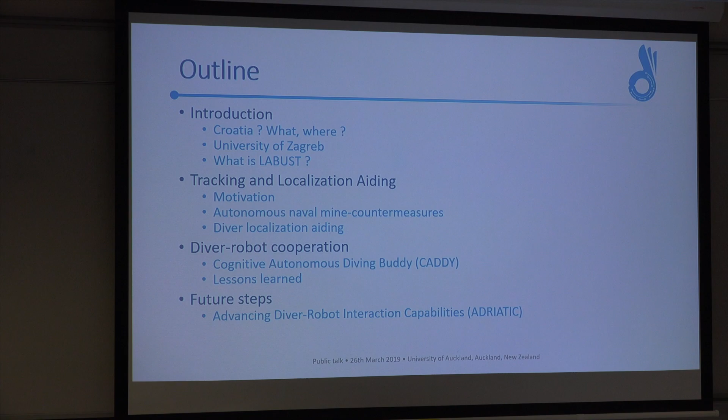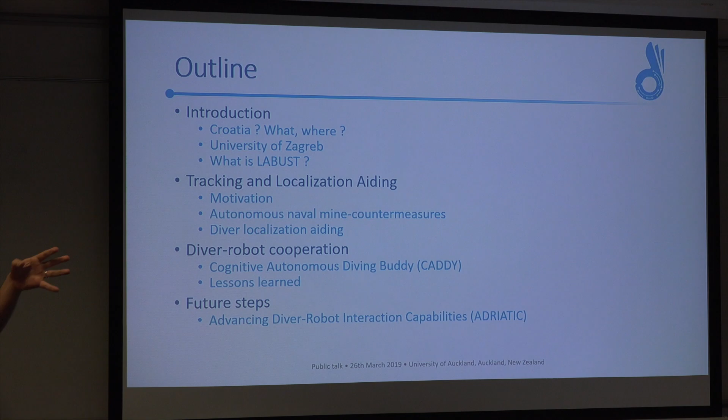Most of you probably know where Croatia is, but we will refresh your memory. I will talk a bit about the University of Zagreb and our laboratory, what we do. After that, we will continue to some interesting things like tracking, localization, aiding for divers and also for underwater vehicles, and show some projects we went through, in which we actually first started with vehicles and then ended up at the divers. Then I will talk about the Cognitive Autonomous Diving Buddy, or CADDY project, which was actually our first really large diver-robot interaction project.

Based on some lessons learned during this project, we were able to acquire this ADRIATIC project that we have with our partners here at the University of Auckland, and perform another set of improvements towards getting this more product ready rather than just doing basic research.

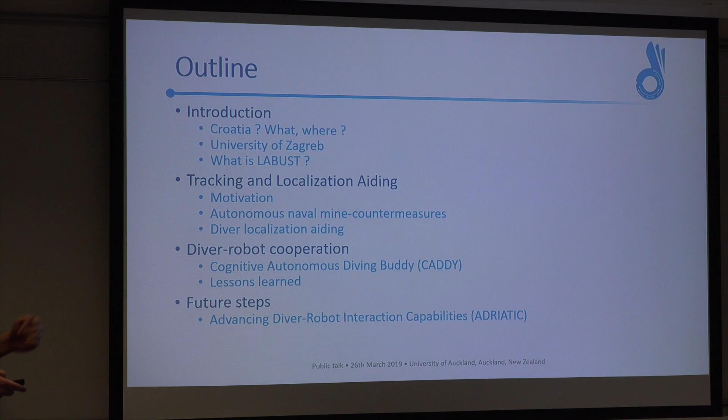So let's get started. To refresh your memory, I've shown here a few pictures from Croatia. There are a lot of pictures, so I didn't know which to choose, but I took some of the most memorable. If you like history or Game of Thrones, you know about Dubrovnik, a medieval city in Croatia on the south part of the coast. If you follow football, you know our national team, or probably some of the players like Modric, and you know they won the silver medal last year on the World Cup.

If you like nature, like the beautiful nature you have here in New Zealand, then Croatia has a lot of beautiful inland nature and a very developed coastline with thousands of islands, and also a mountain range very close to the sea. So this is a nice way to walk, looking at thousands of islands from the mountain.

And finally, if you really like Christmas decoration, you'll be glad to hear that Zagreb has won this award for the Advent, for the best organization. So the best Advent in Europe is actually in Zagreb for several years in a row.

Since we're also engineers here, I guess we should have some numbers. Croatia is located in the south central part of Europe. It's a quite small country, like 4 times or more smaller than New Zealand. The land area is around 56,000 square kilometers. The sea area is around 30,000 square kilometers, and this sea we actually call Adriatic, similar to the name of the project.

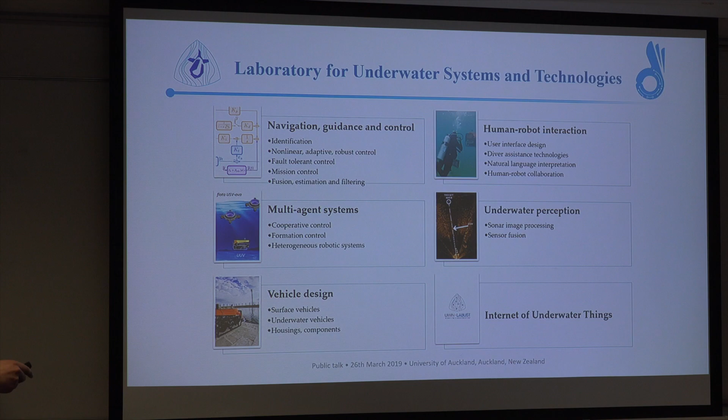As of 5 years, we have human-robot interaction. We started this with the CADDY project, and also underwater perception, because you really need to find the diver in the water and be able to communicate with him. And as sensors are now getting much cheaper and smaller for underwater, we also started looking into the Internet of Underwater Things. The Internet of Things on land is already picking up, so it's time for it to go underwater anyways.

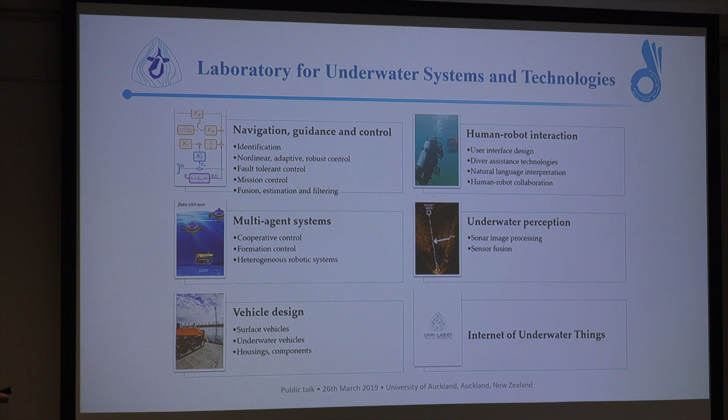So this is a short introduction about who we are, what we do, and where we come from. Now we can move to some of the projects that we do. Our first interest was in tracking and localization aiding of underwater agents in general.

So why this fuss about underwater localization? The thing is, if you're on land outdoors and you have a global navigation satellite system, you pretty much know your location. Once you move indoors, you already have some problems - you need to use either a camera or mount some new sensors inside the room to get your location. And when you go underwater, it becomes even more complex. Now you have a 3D environment where the visibility is very bad, and you lack global navigation satellite system completely, as soon as you go underwater, since GPS or electromagnetic signals in general are attenuated very much underwater.

So if you're moving in a water column, you don't really have any reference to where to go. It's useless to use a camera because you don't have any reference. And even if you're on the bottom, you could have a featureless bottom, which also makes it very hard to navigate a vehicle in such an environment.

There are some alternatives, and these are usually quite expensive sensors, starting at some 15,000 New Zealand dollars and up. These are acoustic sensors like the Doppler velocity log that give you velocity of the vehicle relative to the sea or relative to the bottom, if you can reach it. You also have localization systems, acoustic, that give you distance or bearing towards a beacon that is either georeferenced underwater or floating with access to GPS, so it knows its position. So this is how you can get position. These are usually very slow systems, especially acoustic localization. Maybe each second or each 2-3 seconds you can get a position, and the farther you go, the longer it takes, because of the travel time of the acoustic signal. So even if you manage to get these expensive sensors, when you go for scaling, it gets very, very expensive.

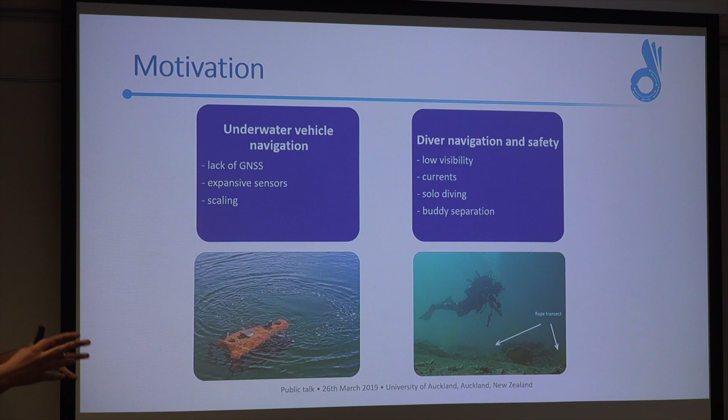This is why we actually started the CADDY project back then - this relation between underwater vehicles and divers, noticing they have the same problems, so we could give the same solution for both. This didn't occur to us at first, of course, but we had one project where we noticed these similarities very easily. It was some 10 years ago, autonomous naval mine countermeasures. The basic idea is you want to remove the manned ship from the minefield - you don't want people there, so you need to ensure crew safety.

It also reduces a lot of the cost, because if a ship is destroyed, it's very expensive and a lot of lives are lost. If a small autonomous vehicle is destroyed, well, you just buy another one. It's not such a problem.

At that time, there were some alternatives where usually you would have a remotely operated vehicle equipped with a sonar and some expensive sensors. You would be a little bit off the minefield but still with the ship, put it down, the operator would drive it to the mine and then neutralize it. So for this you still needed a ship, so they said let's have an autonomous vehicle that could detect the mine by itself and then neutralize it.

This is fine, but if you want to detect a mine, you really need a very good sonar, and a very good sonar is also very expensive and large. So it didn't make much sense to destroy it.

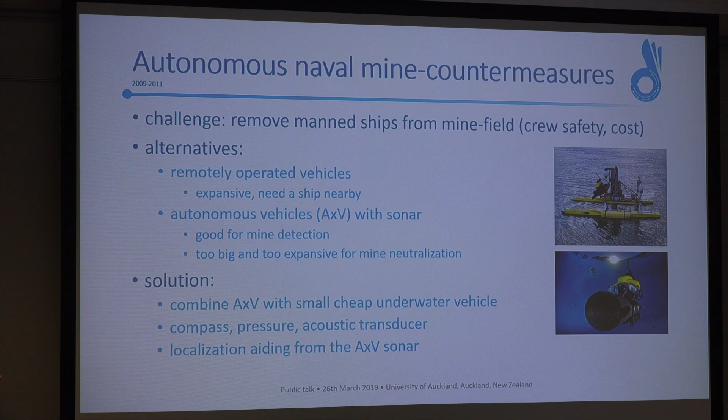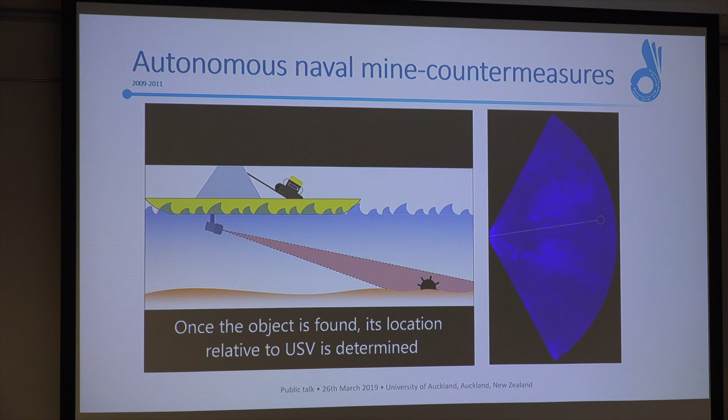So our solution, at least in this project we investigated with NATO, was to combine a small, cheap underwater vehicle equipped with just a compass and pressure sensor. The concept was you would have either an autonomous surface vehicle equipped with this sonar, or an underwater vehicle with a sonar, that would carry this small vehicle.

When it finds the mine, it would drop the vehicle into the water, detect it with the sonar, using this expensive sensor to provide localization aiding to the small vehicle and guide it to the desired target.

The communication here is just acoustic communication again, and the vehicle had just a cheap acoustic transducer. So basically the communication was one way.

The idea was, okay, we can place it near the mine, we can activate it when we want, and we can go off, because with acoustic communication you can easily achieve 1-2 kilometers, so you can go to a safe distance. You can maybe use it to position this overnight in the minefield, and then when you really need to do the attack, you activate them, clear the minefield, and go out with the ships.

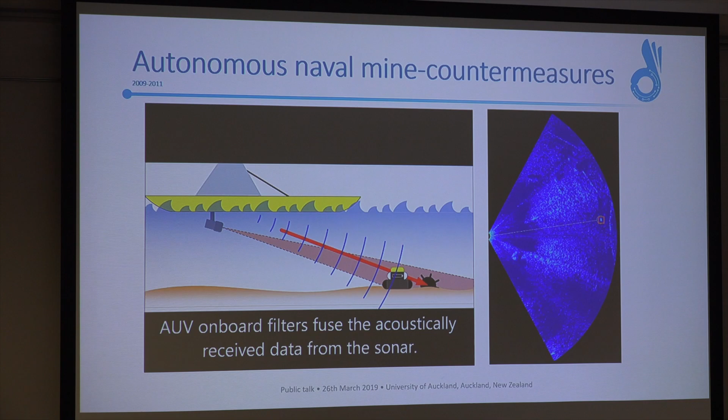So there were a lot of applications for such a thing. But then we thought, okay, this small vehicle has a compass and a pressure sensor. It kind of sounds like the same sensor suite that a diver has. So why shouldn't we try this with a diver?

So we took on a small diver tracking and localization aiding proof of concept project to see what would happen. We decided first to go with a surface vehicle. We could either mount the sonar on it or maybe some other localization device.

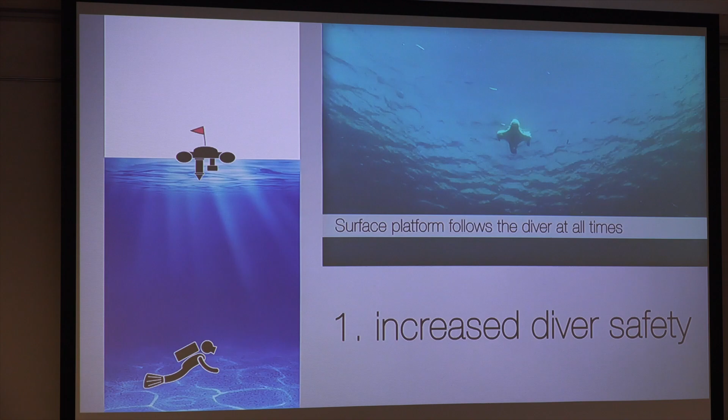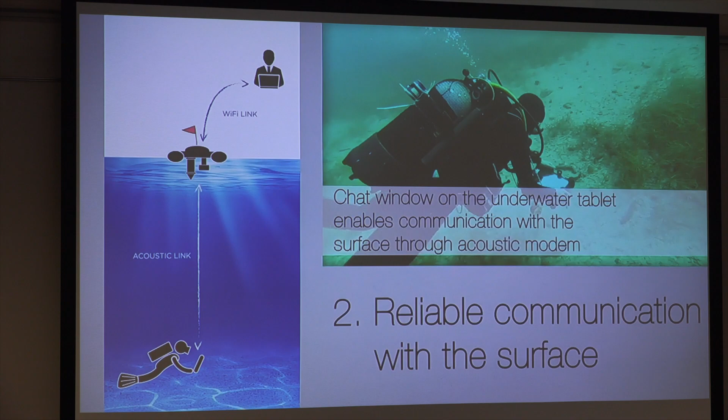What we did was create this small vehicle and mount an underwater localization system, a USBL, an ultra-short baseline system. This system communicates with the diver through another modem. The diver has a small beacon on his back that can communicate, and you achieve simultaneous localization of the diver and simultaneous communication.

We added a simple commercial tablet, just put it in a housing, and used an inductive pen to operate it. We created an ability for the diver to actually chat with the surface, and the surface could send the diver back some commands or answers.

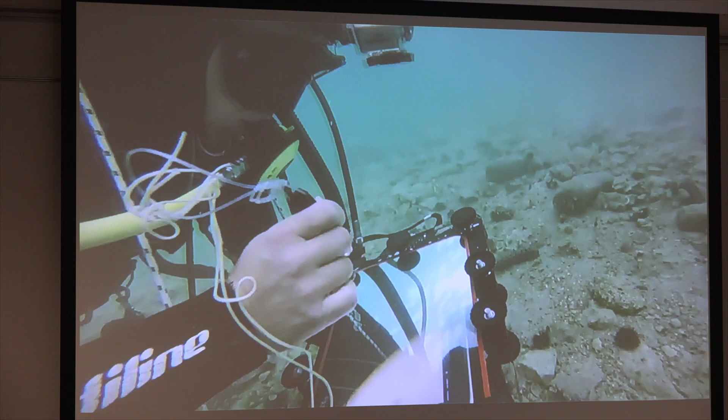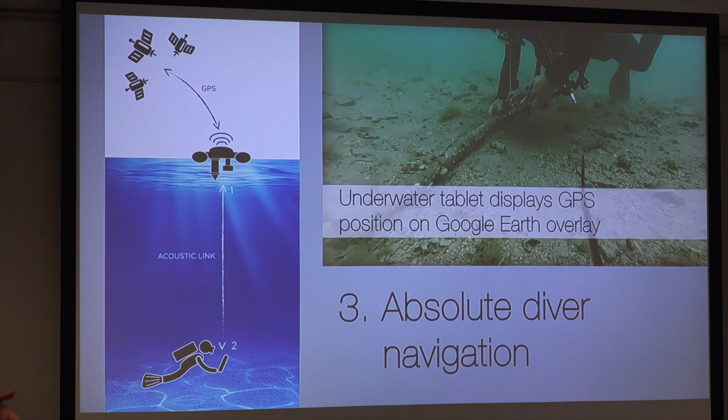Since the vehicle is equipped with a GPS and this localization system, it can actually know the diver's position and send it down to the diver. So the diver has his own position on the map, and if he needs to go to some point, he can simply look at the tablet, position himself, and go there. This was much easier than looking at the compass and counting how long you go.

Also, this vehicle was doing the tracking just to ensure that the acoustic channel is as vertical or short as possible, so that it is quite reliable over time. The divers seemed to think this is a very good idea.

The thing was, okay, so this vehicle tracks and gives you position, that's good, but it doesn't help you a lot more. If it's above you, it's maybe like a diving buoy, so you have like a private satellite. They wanted a bit more, so we were thinking, okay, what could we do?

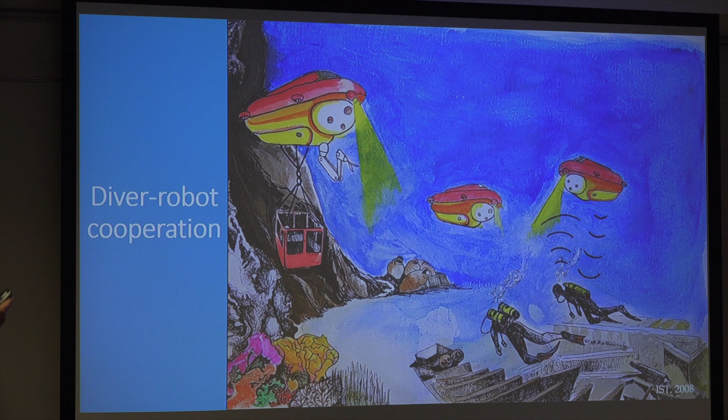One option was, of course, let's try to introduce another vehicle, just throw another vehicle at the problem. So we decided to still keep the surface vehicle and add one underwater vehicle. This vehicle would be like a diving buddy, basically always close to the diver, so it could do better localization aiding and give better positioning. It could also perform mission monitoring, because being close to the diver it can record with a video camera, not only with the sonar.

Finally, it would be a very good tool so the diver could use it, record it, drag it around, or tell it to do something. Of course, the diver himself is very good at scene interpretation and manipulating small objects, which is very hard to do with the underwater vehicle. On the other side, the diver would need to carry all the underwater vehicle sensors, which would be cumbersome for him. So basically we have a diver-robot synergy here.

That's why we decided to call it BUDDY. This project was, as I mentioned, called CADDY. It involved 7 partners, and we got some 3.7 million euros to do some testing.

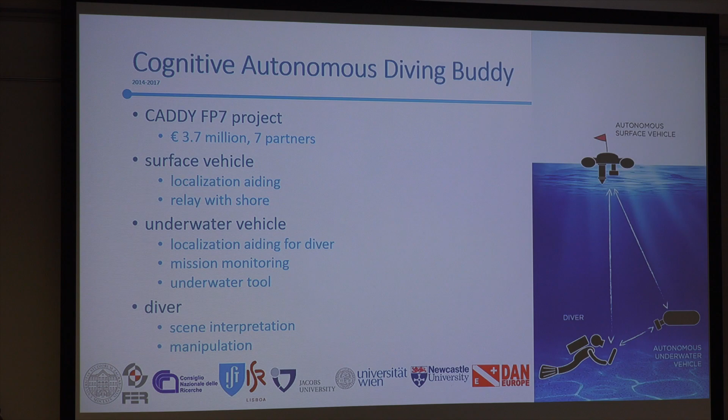When you look at this possible diver-robot synergy, there are many avenues you can go down, so we had to select a few. We decided on these 3.

The first one was diving observer. We wanted to collect as much data as possible about the diver and about the whole dive, and in the end give this to the diver. He could get feedback, see what happened during the dive, and always log his dive to look up the data each time he needs it. This was especially aimed at technical divers that do some work, or archaeologists, marine biologists, etc.

So what we did here was try to create a new vehicle. We made the AUV omnidirectional, so it can move in surge, sway, and yaw at all times independently, which was required for future use, like for a tool.

It had all the sensors needed for absolute localization, and it had sonar and a camera to record the diver. On the diver himself, we had the acoustic modem, but also the DiverNet system, with many IMU sensors—in this case 14—for full pose reconstruction, so we could combine this with physiological parameters like breathing and heart rate, and detect when the diver is in distress. Then the system could emit a signal either to the dive master that there's a problem with the diver, or even in the future it could intervene and help the diver.

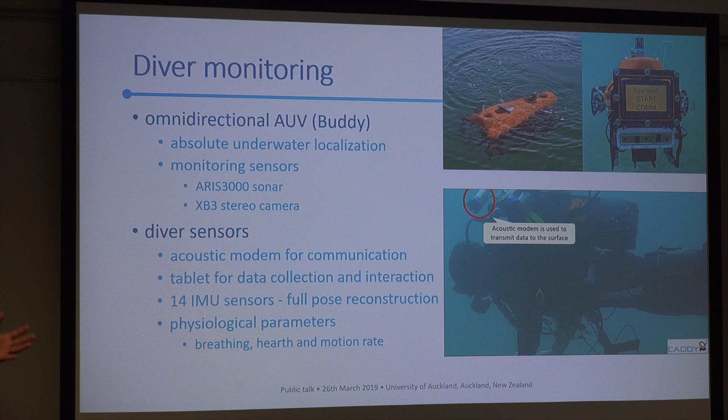Since we already had these sensors, we needed to track the diver and detect him in order to collect all this data.

The 2 main sensors we used for detecting the diver were the sonar, as I mentioned—a 2D sensor that gives you range and bearing towards a point. You have no information about the depth of the diver; this you need to get from another channel. You have a medium range to operate here, 15 to 20 meters, and you can still detect the diver, this blob that is swimming.

The good thing about the sonar is it's not sensitive to visibility conditions. So basically, if it's murky water, you will get the same image as clean water. You don't see any difference between clean water and murky water in the sonar, at least.

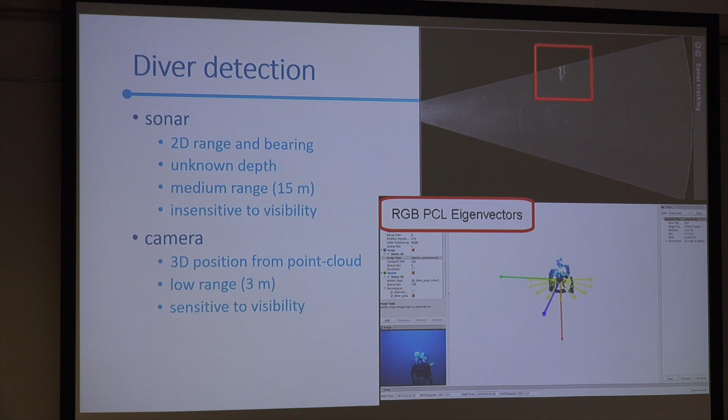The camera—we had a stereo camera, and we used this to get the complete 3D position of the diver from a point cloud. However, as you can see, even here in very good visibility conditions, when the diver is close, some 3 meters from the vehicle, the point cloud is still very noisy.

So the problem with the camera is it has a very low range. Up to 3 meters you get some robust measurements. After that, it starts to get a lot of dropouts and noise, because it's sensitive to low visibility, just as human vision.

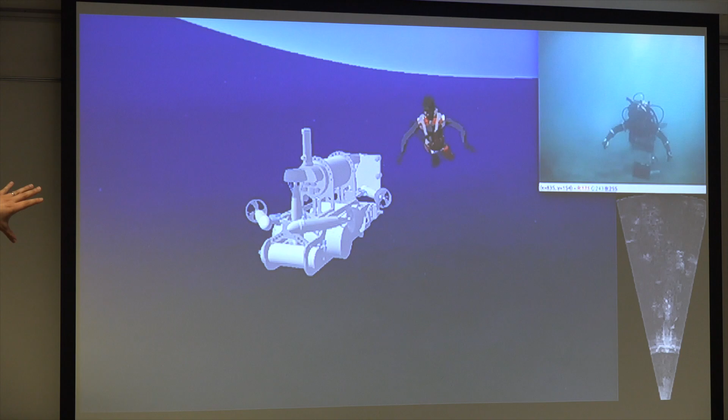Once we had all this data, we could give it to the diver. He could take a look at all the video streams on the vehicle—there were a few more cameras than this one—and he could see the sonar recordings. We also gave him a 3D replay of the mission, where he could see his relative position to the vehicle, and also all the information from the pose-estimate sensors.

So once we had all this information about the diver, we decided we should try and help him during the dive. So the next move was, let's try and create a dive guide.

Basically, the diver should have his tablet, select some point, and tell the vehicle to guide him to that point, because why would he look at the tablet all the time and aim for this point when the vehicle could do it? There are many ways you could do that.

One normal way would be to exchange some master-slave roles. When you want the vehicle to guide, you give it a master role, it starts and goes to the point, and you follow it. But what happens if the diver decides to go off, or he needs to remember to stop the vehicle, put it into slave mode, etc.

So again, you would have a problem of possible buddy separation. We decided we will not do any master-slave roles. We'll put the diver in charge and see what we can do with this.

We decided to create a circular path connected with the diver. We want the vehicle to converge on this circular path. Once it converges on the path, it can maneuver on this path without any danger of hitting the diver. So that was a nice first step.

When the diver is moving, this path moves with the diver. So inherently, you get tracking because the vehicle maintains its position on this circle. And the good thing about positioning it on the circle, since it's omnidirectional, we could easily keep any position on this circle and always look at the diver at the same time.

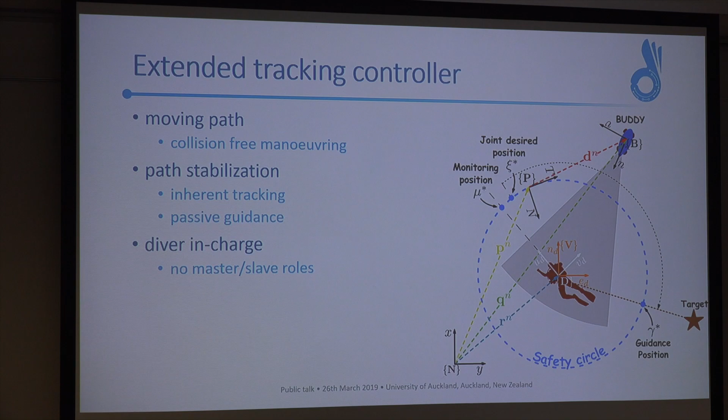Once we had this done, we did some tests in the pool that I want to show you. These tests were done on the program review. Basically, the diver was turning in place, and the vehicle, as you can see, is moving in a circular fashion, staying on this circle. In this case, it will come in front of the diver.

Once it's in front, the diver was instructed to continue straight along the transect. This was just a simple test to see if the vehicle is maintaining its position or distance from the diver as required, and if all data is collected as it should be. We could get some performance indications from that.

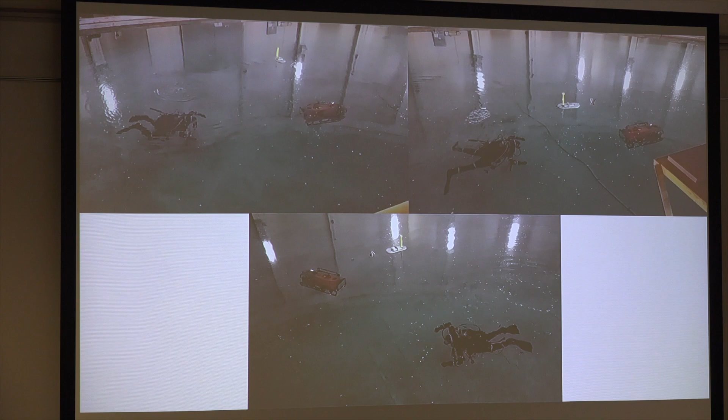In this case, I should mention there is no guiding. The vehicle is just set to always be in front of the diver, so it actually detects the orientation of the diver and goes in front. When the diver was at the end of the transect, he set a point and started swimming back on the transect, ignoring the vehicle, so we could check if the vehicle is adjusting.

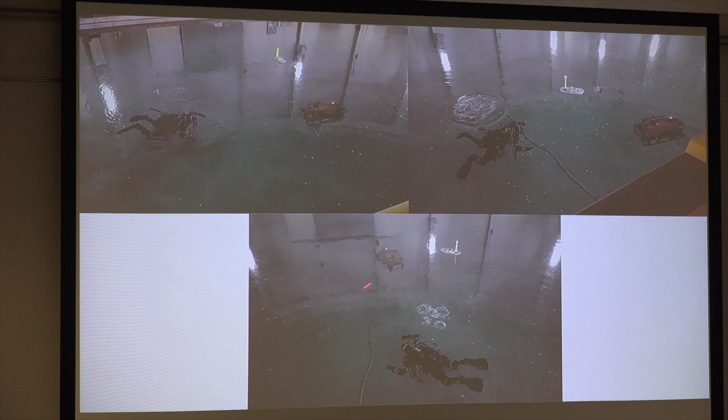So you can see as the diver is moving, the vehicle is slowly adjusting to point towards the given point, which was somewhere outside of the pool, in the direction of the door, I guess. So this was quite a simple test where we could show we'd be able to point to the direction of the target, and the diver could use this as a pointer.

And then we asked ourselves, what more can we do for the diver? So we were adding a lot of functionalities, like area mosaicing. Maybe the diver wants to do a mosaic of some area, so he just commands the vehicle, create me a mosaic. The vehicle had a down-looking camera, would go over the area, and create a mosaic.

Maybe he wanted some photo documentation, so he could command the vehicle to take a photo. Or maybe he wanted some tool from the boat, so that was a nice functionality — he could just instruct the vehicle to go up, bring the tool, and come back. This way, he doesn't have to dive out, and he doesn't lose a lot of time doing that.

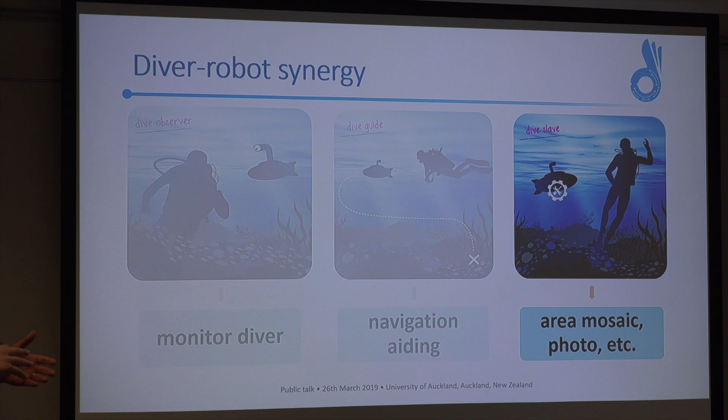And the only question was, how will we communicate with this? One option, of course, was this tablet, but the other more fun option was to try gesture recognition. So we extended the diving gestures with a lot of new symbols, and the diver would usually come in front of the vehicle.

He would sign these symbols, and the vehicle would show what it recognizes on its own tablet. Once it had a complete sentence, it would ask the diver, you asked me to go to the boat, pick up. Do you want me to do this?

And then he would confirm. Once he confirmed, the vehicle would go up, go to the boat, and then, when we simulated adding the tool, it would come back to the diver.

So these are some of the things that we did in this CADDY project. There are a lot more, but these were the most interesting with a lot of videos and movement. But also the important part of the project is that we learned a lot of things, and we noticed what we will need to continue down this road, what needs to be changed.

On the detection front, we noted that the stereo camera is very susceptible to turbid waters, and that we need to find new algorithms in future that can only rely on the sonar. So, to use the sonar to get the exact position of the diver, but also the orientation of the diver, and maybe even estimate the pose of the diver.

And we needed this, of course, if we wanted to improve interaction and collaborative actions. So if you want to do some picking up of equipment with the vehicle, then the vehicle really has to know a lot about the diver's orientation, pose, what the diver is doing, in order to pick up this object, to synchronize this action.

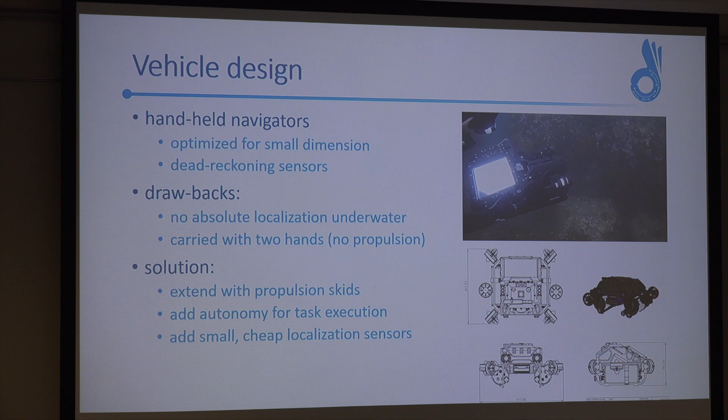Their only drawback is they have no absolute localization, so the error is unbounded. So usually they use a floating buoy with a GPS. They put it up, get a fix, and put it back down. So it's tether management problems, etc. It also has to be carried in 2 hands, so you need to put it down close to bottom. You can easily lose it if you're not close to bottom, it just falls down because this one is negatively buoyant.

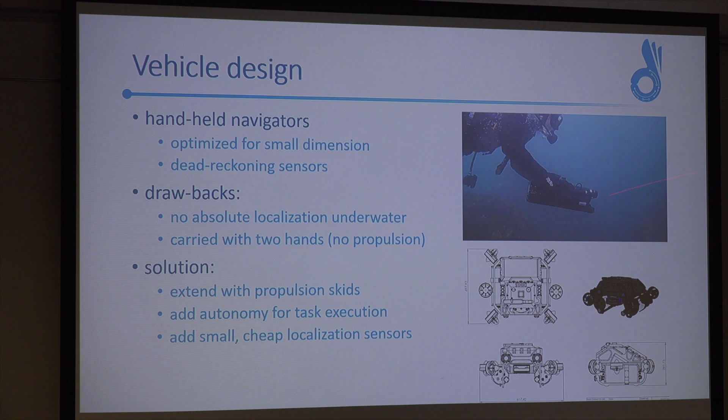So the solution is to use the small dimensions and all these sensors that we can, and maybe expand it with a propulsion skid, so that we could take the handheld unit that divers already have. We would mount the propulsion skid around it, so then we could add all the autonomy we had in the CADDY project, more or less. If we combine this with a small, cheap localization sensor, something like an anchor that you can drop to get a reference, then you have bounded navigation. It can last for a longer time, and it can also be used pretty much as an autonomous vehicle over time.

On the gesture side, our partners at University of Auckland will develop an intelligent underwater glove that recognizes some static and dynamic gestures. All the processing is done on the glove, and the glove also provides haptic feedback, so you don't really need to look at the tablet anymore. You get haptic feedback, and it's much easier for you, more natural.

And we intend in ADRIATIC to maybe get rid of the tablet completely. The best thing, of course, is no need for visual processing on the body, so you don't need even line of sight between the two vehicles. It could be 100 meters away, and you could still do your command, come here, and the vehicle would come back.

For example, if they are not deployed at the same time and don't dive down at the same time, there are minimal acoustic transmissions because no raw data is sent, just one command, maybe a byte or two of data. This is very good because acoustic communication is very low bandwidth, 100 to 400 bits per second if you want real time. You can go a bit faster if you do buffering, but usually it's very, very slow compared to Ethernet as such. And of course, there is no need for a full face mask.

This is one alternative we could have for gesture recognition, maybe when you talk and say the gesture, you say what commands the vehicle should do. But then you need a mask where you can actually talk all the time, which is usually expensive, not for the military, but it will be expensive for a recreational diver.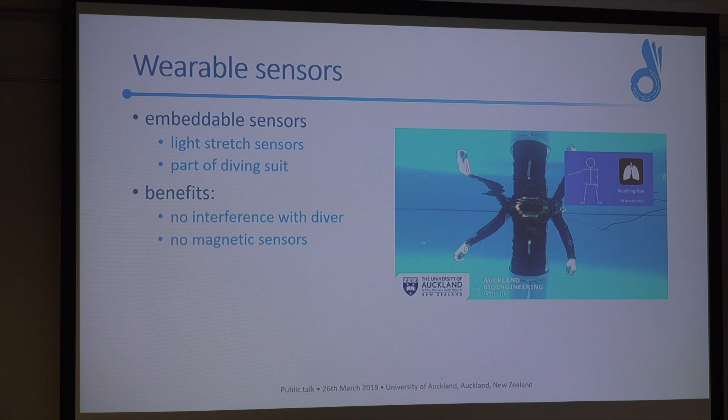So by putting the sensors in the suit, it becomes quite natural for the diver, and you still have full pose reconstruction. Also the good thing is no magnetic sensors needed. If you want to use pose reconstruction with IMUs, you do have to use magnetic sensors to get all 3 angles, roll, pitch, yaw of the joint. And it's very hard to constantly calibrate 14 IMUs when you have a stainless steel bottle and other equipment with the diver that is moving around and maybe not static. So as you may have seen in the replay, there are some errors in the pose estimation just because of this magnetic sensor. Apart from this, we'll probably do a lot more improvements, I hope, that we can present next year or the next 2 years, actually.